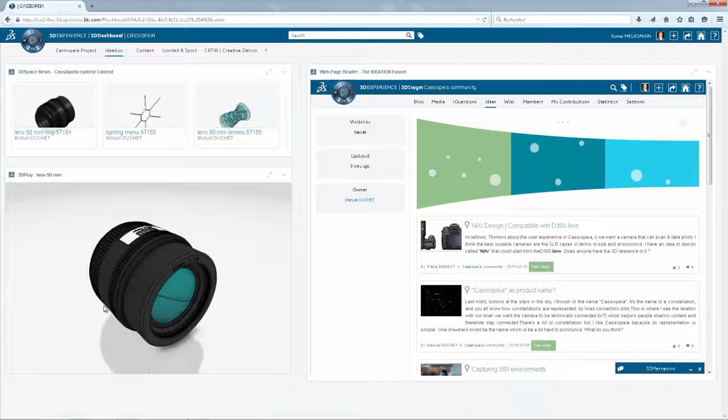During the inspiration phase, all members can easily share ideas, trends, and thoughts, leveraging the advanced 3D and interactive capabilities of the platform with posts, comments, and likes. All disciplines in a company and its ecosystem can participate in the creation process.

Creative designers benefit from collaborative ideation and innovation capabilities, leveraging the 3D dashboard that monitors and communicates project status, design trends, inspiration walls, blog articles, and others. This displays information from external communities that each creative designer can enrich and nourish from.

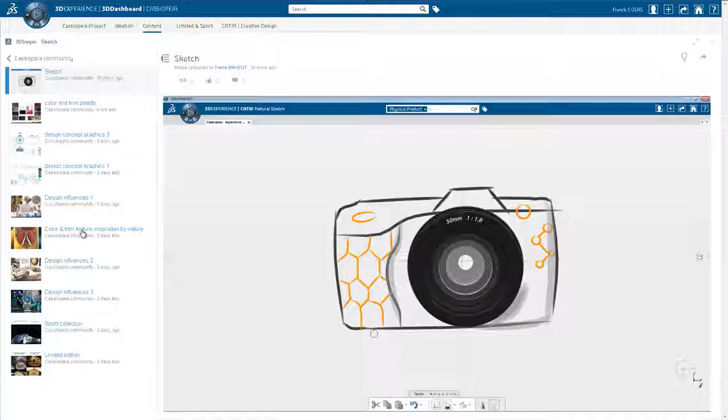In a couple of clicks, anyone can share an interesting article with colleagues or partners. All users can access and reuse 3D data from the dashboard. The 3D data can be easily viewed, explored, and even exploded to ensure clear understanding of the project.

To manage the project, an idea funnel is available, where anyone can navigate, study, compare, and challenge ideas. The size of the dot represents the number of likes made. Based on this information, managers can mature them from proposal to concept up to validation.

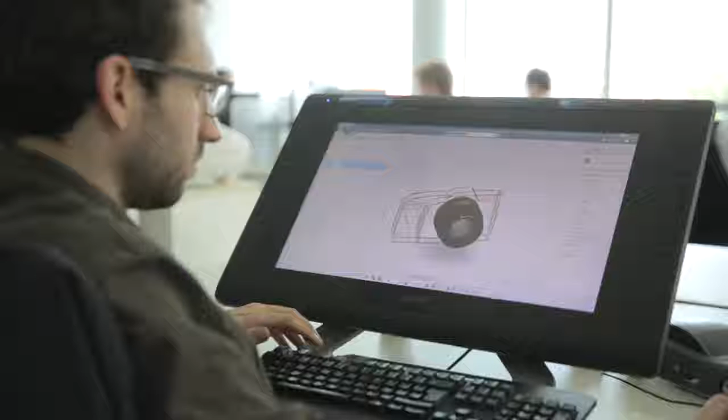What if all industrial designers and stylists had the powerful instinctive tools which would allow them to focus on innovation? CATIA Natural Sketch is a breakthrough concept. This integrated 3D sketching solution allows industrial designers to create 3D sketches to express and communicate their creativity.

This means they can be more creative by exploring more design alternatives. This 3D sketching technology is a paradigm shift in the ideation step.

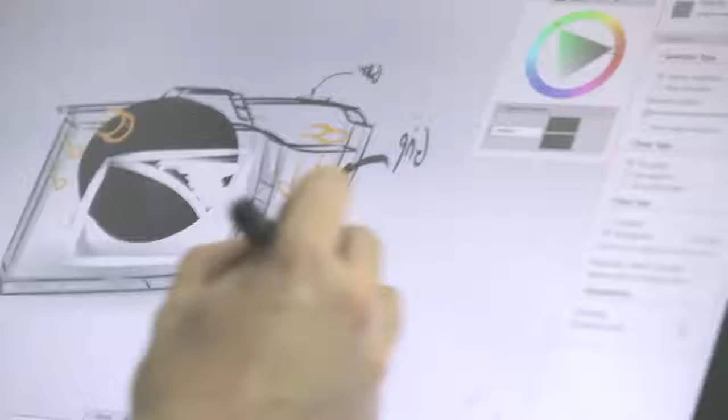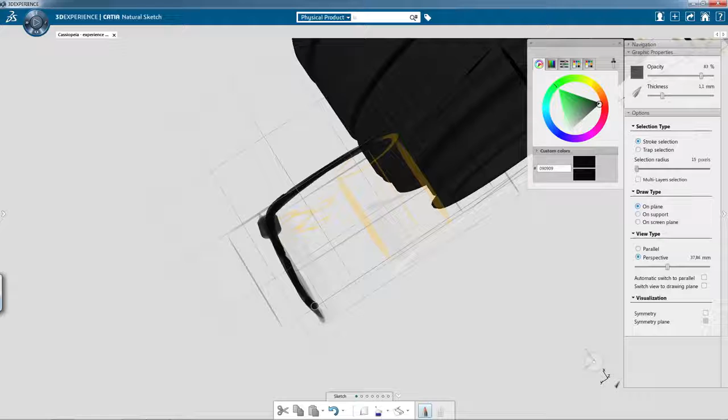It gives designers the ability to transform their 2D idea into a 3D reality and to explore detailed design variations directly on 3D objects. 3D sketching permits a better understanding of design intent, surfaces, and volumes, which avoids misinterpretation of 2D views, bringing together the intuitive gesture of painting and the power of realistic 3D modeling.

CATIA Natural Sketch can be used at all phases of the creative workflow. This accelerates the creative process by bringing a better level of communication between designers and the rest of the team.

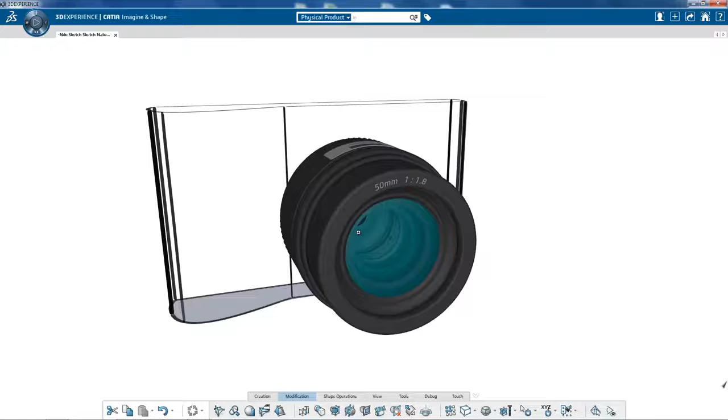What if digital modelers could easily convert any idea into a solid, high-quality model? Now, based on this 3D sketch concept, the same designer or another can enter the concept modeling phase with a dedicated workbench called CATIA Imagine and Shape.

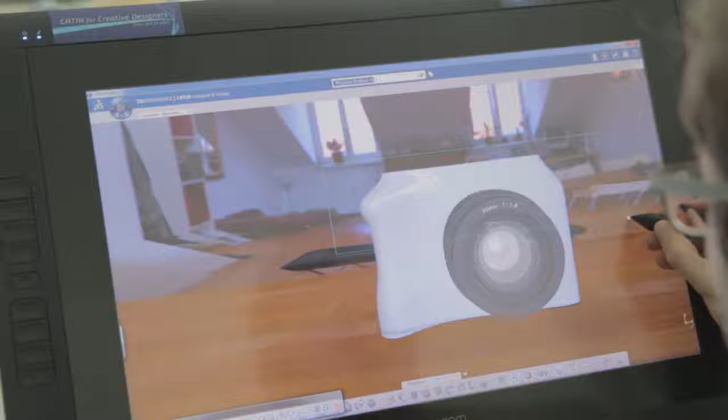Based on subdivision surfaces technology, modelers can sculpt in 3D very quickly, while keeping surface curvature continuity under control. The clay modeling type process is very intuitive and easy to learn. The geometry can be modeled just by pushing, moving, or rotating the virtual clay model.

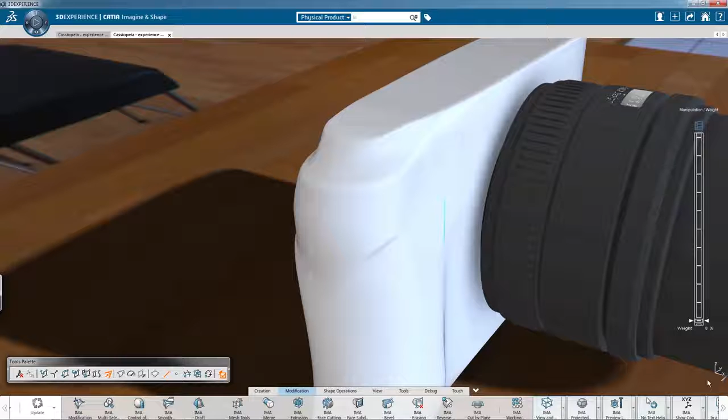This modeling approach gives a lot of creativity, flexibility, and freedom. By drawing curves, you can express your creativity directly in 3D until you find the right design. It's key for high-tech companies to save time exploring concept design variations and to make the right choices for volumes and shapes. Digital modelers can also sketch subdivision surfaces and preview the level of detail.

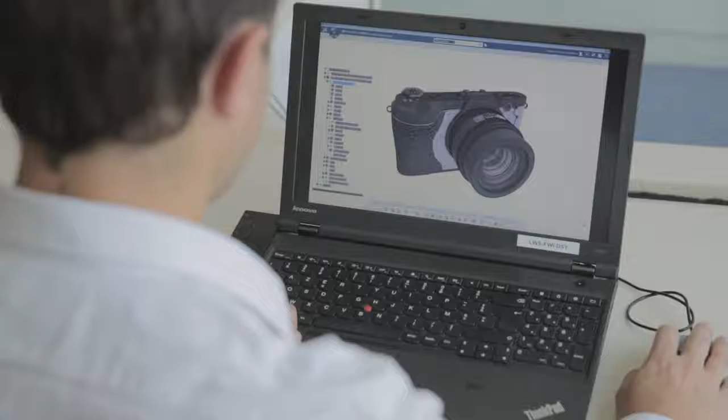What if digital modelers and surface design experts could be on the same page? After the concept design phase is delivered with subdivision surfaces, the project is in the hands of the free-form surface modeler. This expert in advanced surface modeling will create the final high-quality shape that represents the design intent, all while respecting the engineering and manufacturing constraints.

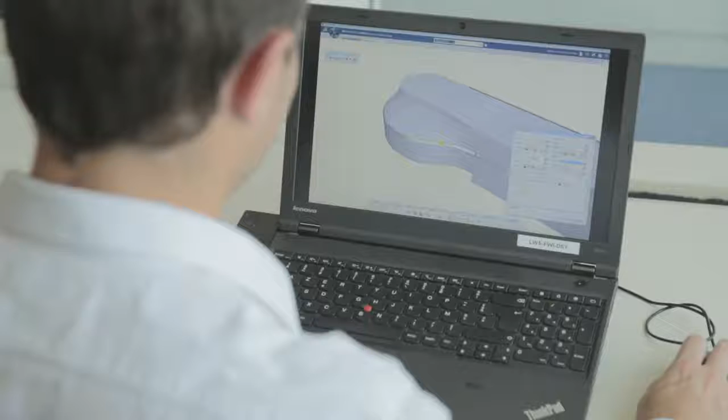The design process benefits from associativity to the original 3D sketch at all times. If we look more closely at the fading edge area, we notice that the surface quality needs to be enhanced. Thanks to direct modeling, the freeform surface modeler can modify surfaces using control points and interactive tools such as zebra highlights in order to reach a better perceived quality.

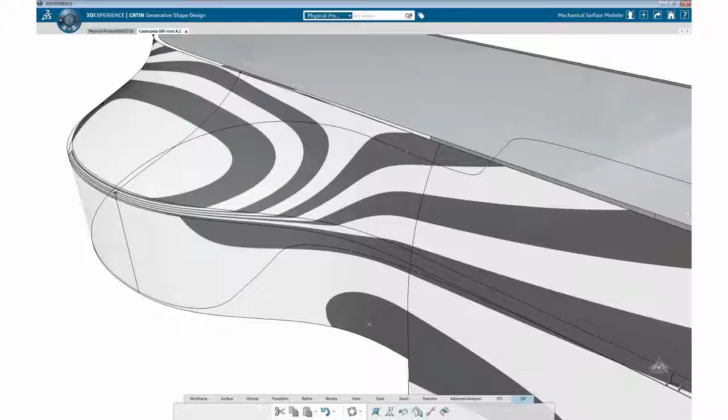Interactive analysis helps engineers assess the quality of the shape anytime during the modeling phases. This integrated approach fosters the creation of very high-quality surfaces in a minimum amount of time. This precision of direct modeling allows the user to reach a high level in terms of highlights. It enhances reflections for a better perceived quality.

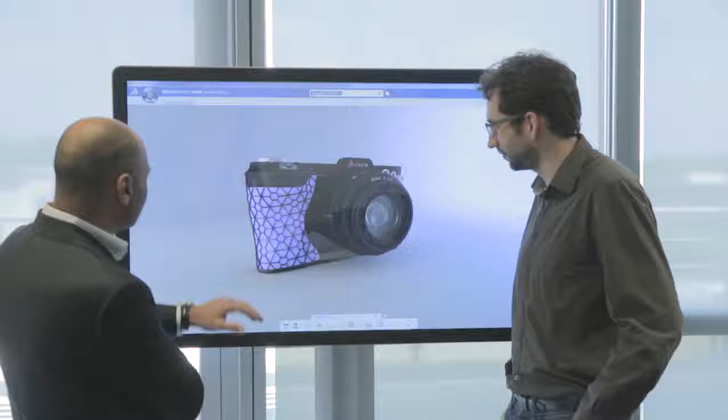What if decision makers could harness accurate information to define the best consumer experience and make the right choices? Major decisions are taken first with virtual prototypes. Having a high-end visualization and rendering solution is a strong requirement for creative designers and decision makers. They need leading-edge and accurate technologies to visualize, present, and share their design.

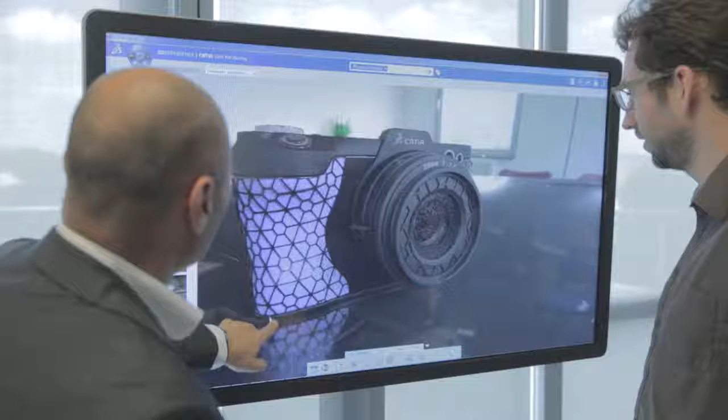CATIA Live Rendering is the integrated solution for multiple needs based on two consistent visualization modes: real-time visualization and interactive ray tracing. With real-time visualization, designers can easily explore shapes, materials, colors, and trim combinations and see interactively how light reflections interact with the material and the shape of the object.

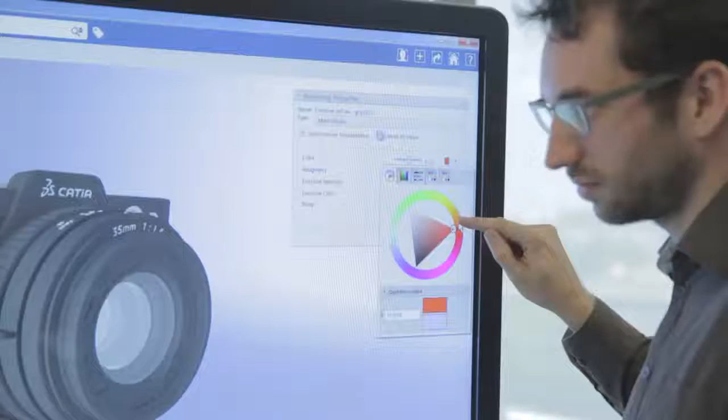It's leveraging the modeling experience thanks to real-time visualization. And for design decision and team review, interactive ray tracing allows designers to simulate physically correct renderings. Managing lights, textures, and a precise material behavior allows the user to make accurate decisions by comparing different alternatives. Rendering performances reach such a level of interactivity that you can engage live discussions.

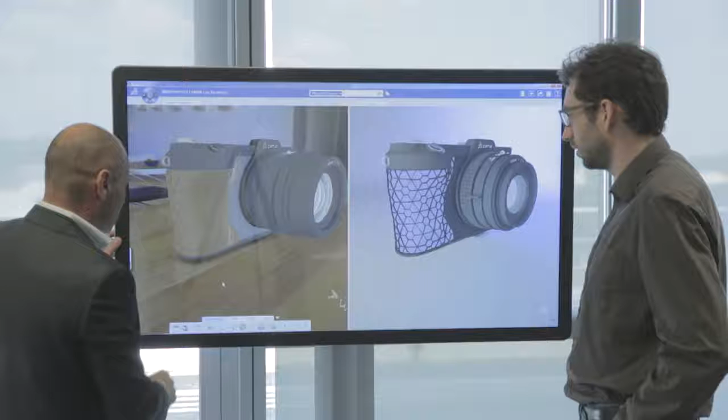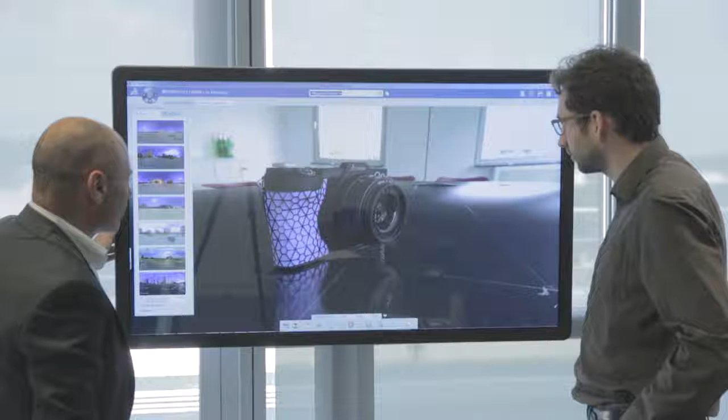All this without any compromise on the quality of rendering, thanks to CATIA Live Rendering global illumination and ray tracing. Usage is based on a photographic user experience. These rendering functions can be used by designers and digital modelers at any stage of the creative workflow throughout the project. Designers and managers can now make accurate design decisions on a physically correct virtual model.

Design validations are also made with physical prototypes. 3D print is used all along the creative design workflow, not only at the end of the project, but throughout the entire process to help designers make the right decisions.

Multiple prototypes can be created that use different materials. The first one is for ergonomic study, to validate by hand surfaces and volumes at the concept clay modeling phase. The second prototype is for physical validation, to assemble and combine all complex components together, and also to study the physical complex mechanisms and usability, assembling existing parts with the new concept.

After multiple design explorations and validations, the most advanced version of the prototype is here to confirm what was decided with previous versions. To reach success, decision makers need a range of tools and technologies to be able to make the right choices.

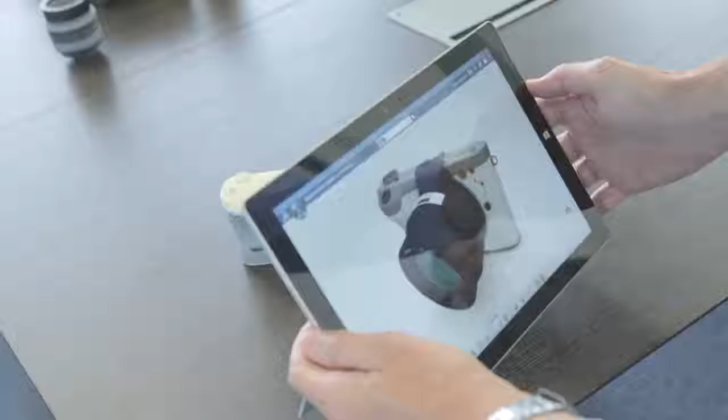Now with immersive and augmented reality, we can mix virtual and physical prototypes together. First, to walk around your model as in real life with your tablet sensors, and second, to experience your product by combining the real world and the digital model by tracking a target.

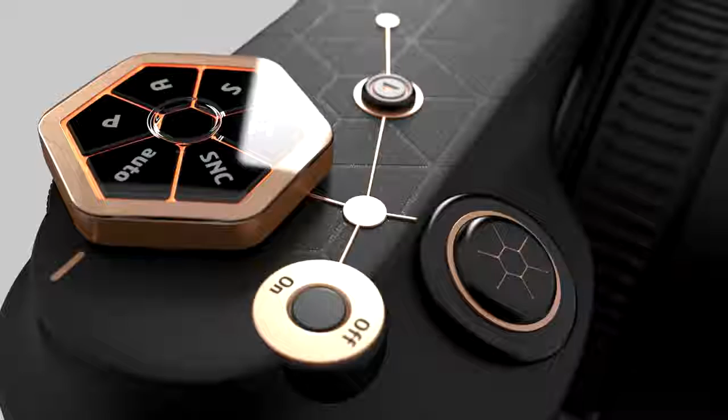In conclusion, Dassault Systemes has developed a unique approach to social ideation and creative design. This unified industrial design workflow solution is tailored for high-tech creative designers who need to imagine, create, manipulate, explore, and validate more ideas. Design teams can create the right design faster by harnessing accurate information and correctly predicting the customer experience.